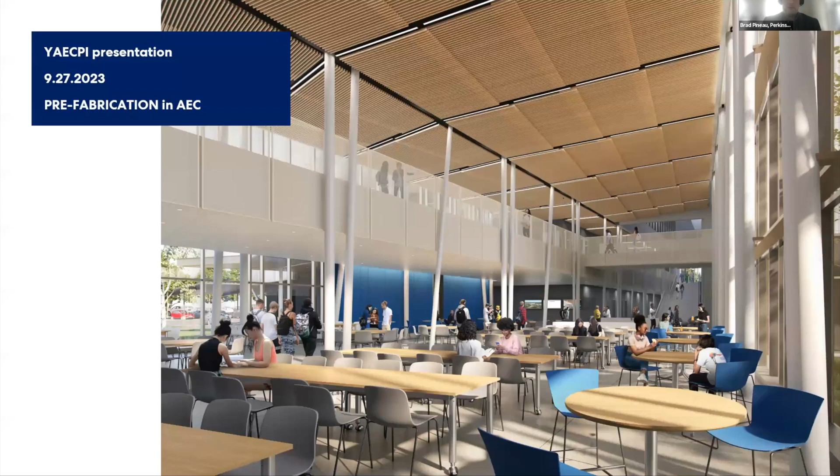Prefabrication and the advantages of full team coordination meetings in prefabrication projects. So my name is Brad Pineau. I'm an architect at Perkins and Will. I'm joined in spirit by Joe Nault, Claudia, and also Sam Shepard from Isgenuity. So between our group, we had two on the construction side and two on the architecture side.

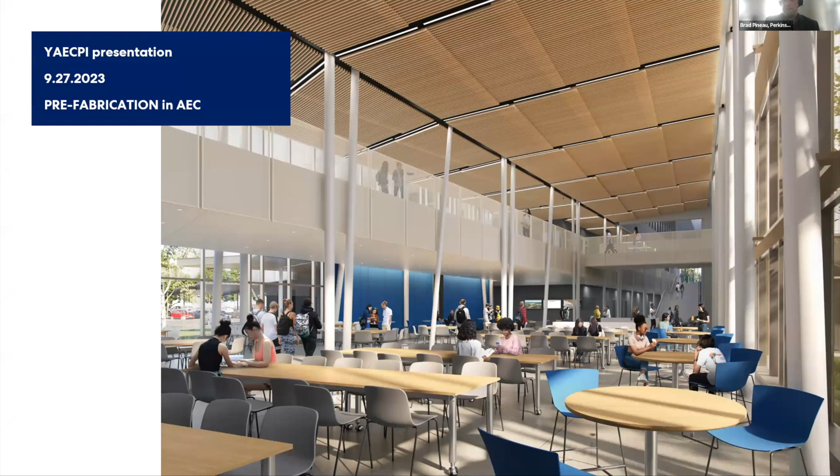What I'm going to be speaking about today, and sort of the purpose of what we wrote about, was looking at the history and processes of prefabrication, and diving a little bit deeper into how that full team coordination has evolved over time. And then we also looked at both the opportunities that are there, but also some of the drawbacks that are there. And then additionally, we wanted to share some case studies, as a few of us in the group have been involved in prefabrication on a first-hand basis.

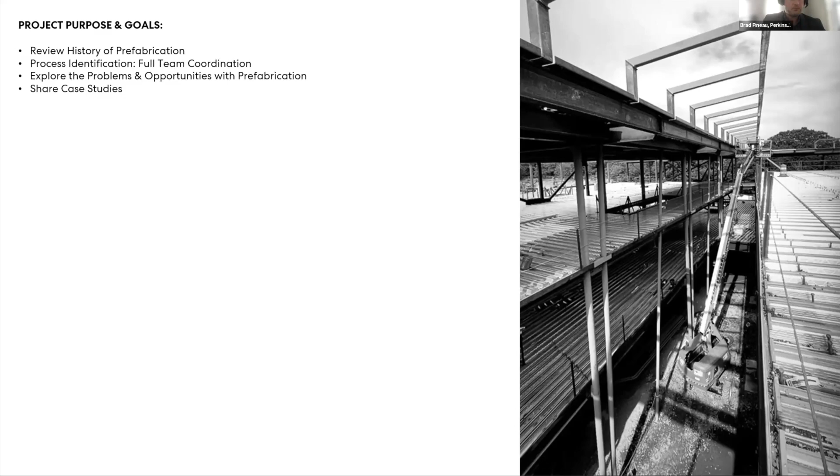So looking quickly at the history and the process identification, as we like to think of it, prefabrication has a really great opportunity to streamline the construction process for many reasons. However, it's not perfect, and modular does not necessarily mean prefab. And I think that was a huge takeaway for us, that it's not always about perfect rectangles fitting into Tetris style designs. Rather, these can be very complex, and oftentimes going for a complex design, it might be really advantageous for many reasons to have a prefabricated execution strategy.

And then also looking into the past, it hasn't always guaranteed efficiency. I think it's an automatic thing for everybody to say, oh, prefab, that's going to be quicker, easier, et cetera. And it might be, but it hasn't always been.

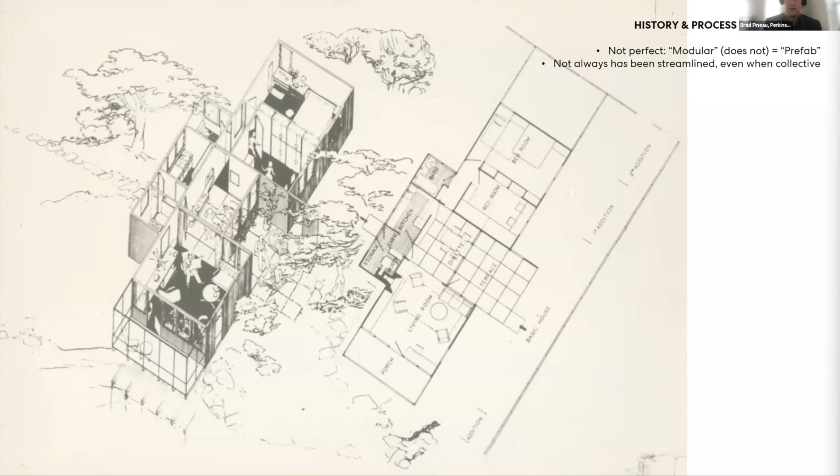So moving into some of these methods and maybe where we are today, what we've been noticing in the industry is that, through the use of advanced technology, there's quite a bit of availability for our different sectors to overlap. So really starting at the beginning, looking at the schedule and getting the owner and the client on that mentality with you about how we can make this project more streamlined, will ease that transition for the whole team to exercise this new way of thinking about prefabrication.

Then we're moving into what some of us might know of traditionally as the design phase, which can be explored more with more stakeholders. So in other words, it's not just the architects coming with the design, rather it could be an opportunity for the contractors to give their input about how certain elements of the design might be delivered, how it might be fabricated, etc., so that it allows the design team to react and design that type of thing into the project.

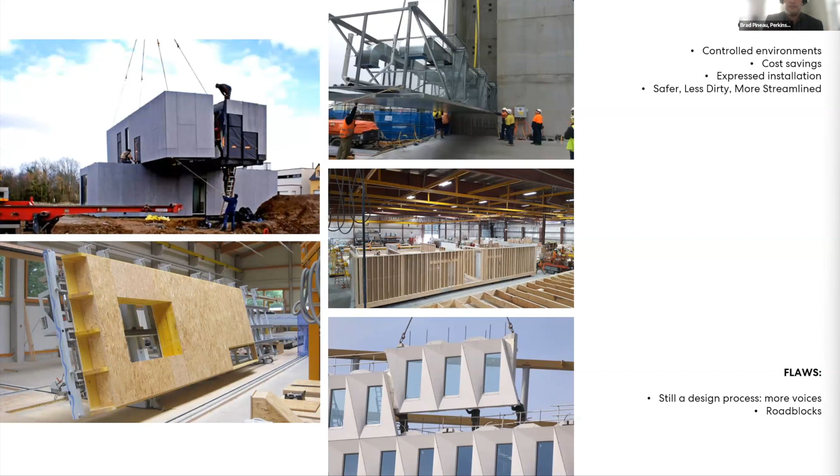So lastly, what we really wanted to emphasize was a couple of case studies. Joe is not here to speak about it, but I will try to help. And then I've also provided one of the high schools that we're doing as well. So this is a look at 50 Rogers Street. And this is a high-rise 136 unit apartment mixed-use building.

So anybody that might have worked on a project like this, there's lots of repetition. There's usually a very common core space where you need to run lots of plumbing and mechanical, and on a large scale, that becomes a really sensitive topic, because any delays are going to affect cost, and it's usually very repetitive work. So the easiest way to get that executed is to have something in place and make everything the same. So what Joe was working on in his job was the shell of this shower enclosure, such that they were able to literally drop these units in place, let the plumbing be hooked up, and then bring everything else around it.

So what it allowed them to do was to streamline their coordination process, and also streamline that install, so that this particular team that is touching many different contractors, plumbers, tilers, flooring, wall framing, all this, it's just making this whole thing much easier to build. And as you can see from these photos, it's a really nice end product.

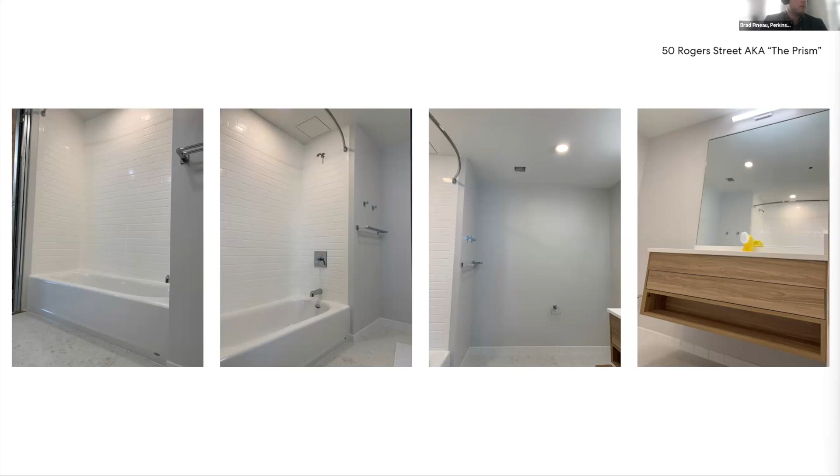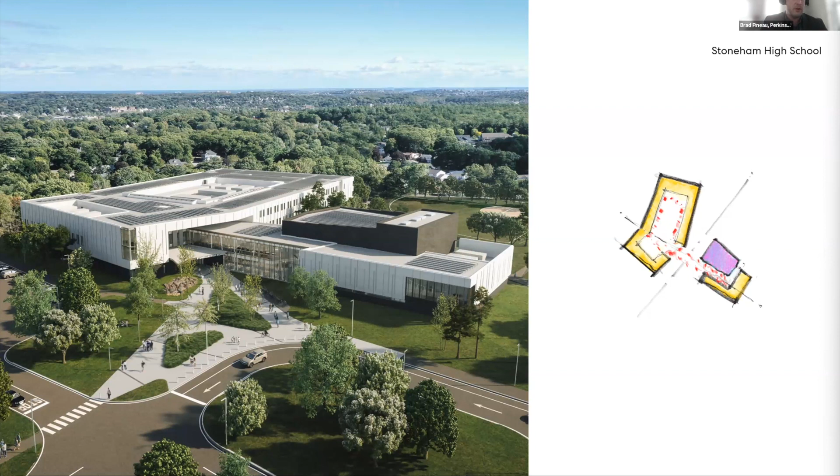This is our tree path, and we have this concept about path and promontory. There's a very kind of throwback to nature that we're striving for in this job. So what that's led us to over the course of the design process is we're looking at these columns, not just vertically, but we've put an angle on them. So there's a through-the-forest type of effect going on, as you can see in this diagram, as you come into the building and experience these main spaces.

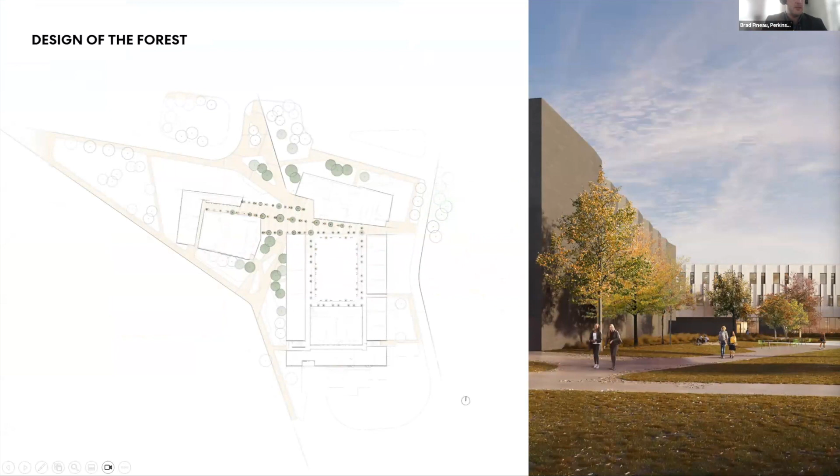As we started to get into the details, we recognized that we needed to really account for the function of how the flooring was going to come together, and also how we were going to tilt these columns into place. We didn't want to have a bunch of columns tilting in different directions. We wanted to really be controlling of how that pattern was laying out. So we started to work through these details to both handle the function as well as control the angle of the column.

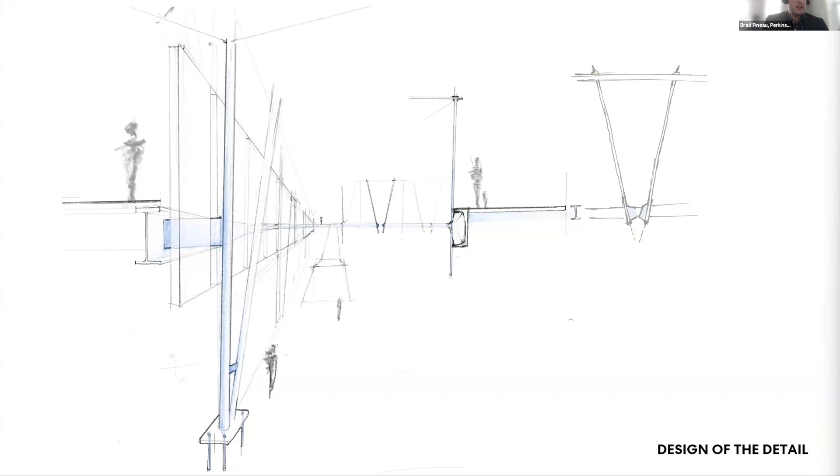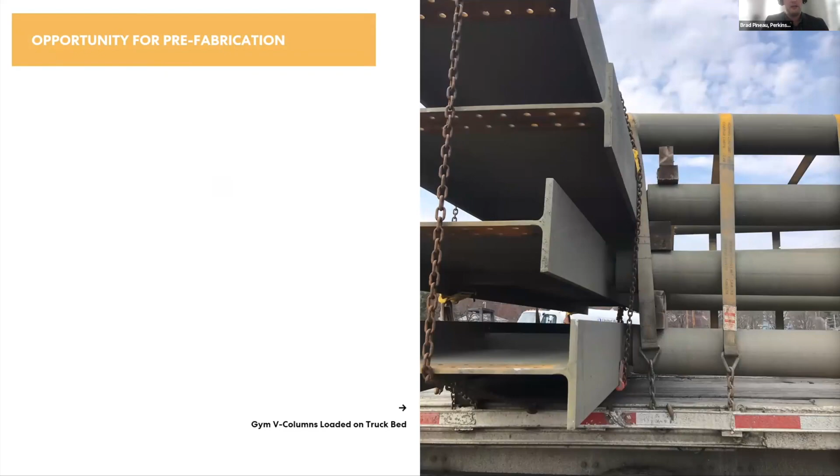So where that ended up leading us was to a place where we said, well, we could use that detail to help prefabricate these members, and maybe that could both allow us to get what we want on the design end, but also help that contractor come to site with deliveries and ultimately execute this thing in the field rather than stick built.

So we were working with Consigli on this project, and it was very simple. We had some draft renderings. We had some Bluebeam elevations of some ideas, and we literally worked through this in sequencing, talking about logistics. We're using some of these details to help us control the angle of these columns. And we were able to determine how wide they might be so that they could travel to the site appropriately, and how long and all that kind of thing.

We do a lot of filed sub-bid work in Massachusetts, so we don't really have full control over how they're going to do this. So it was really a conversation with the CM about trying to strategize and lay the groundwork, I suppose you might say, rather than specifically telling them, hey, we're going to prefabricate this thing.

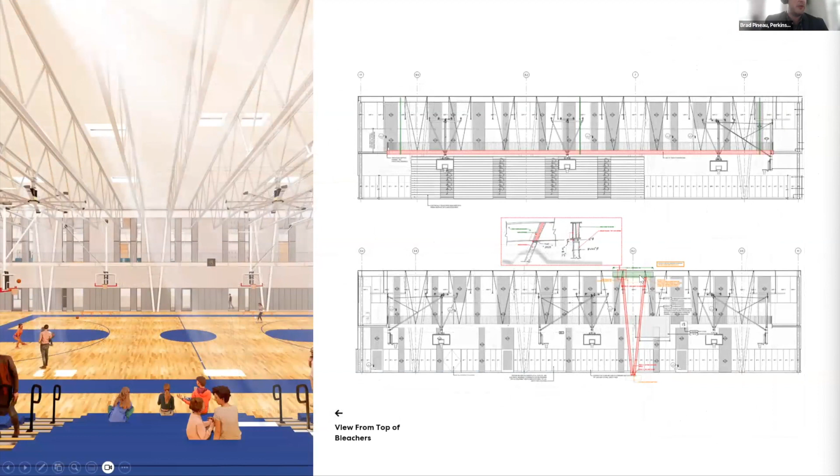When we got to shop drawings, we were really surprised. Actually, if you go back to here, we had planned for this to be in two pieces, the green and the red. And when we got to shops, they actually ended up putting this whole thing together, which was really exciting. Both that our plan worked, but also that they were even taking it a step further. I've got some photos here of them bringing these pieces to site. And then this is for our main gym space, which you saw in the previous rendering, and what they're able to do. Let me just do this real quick.

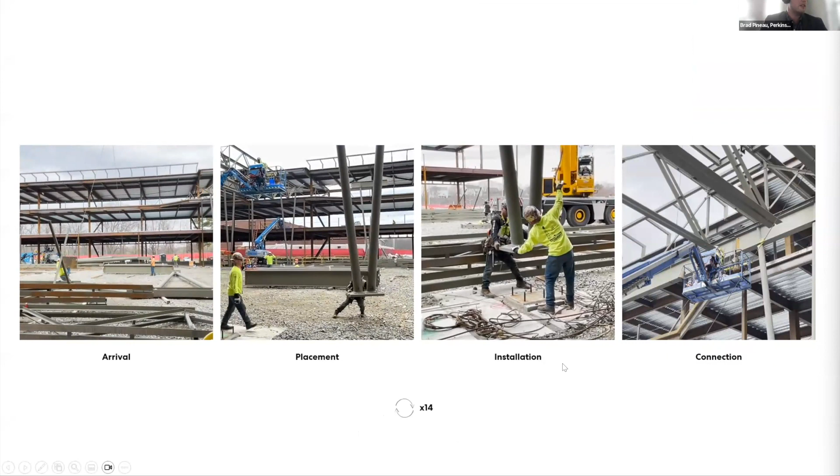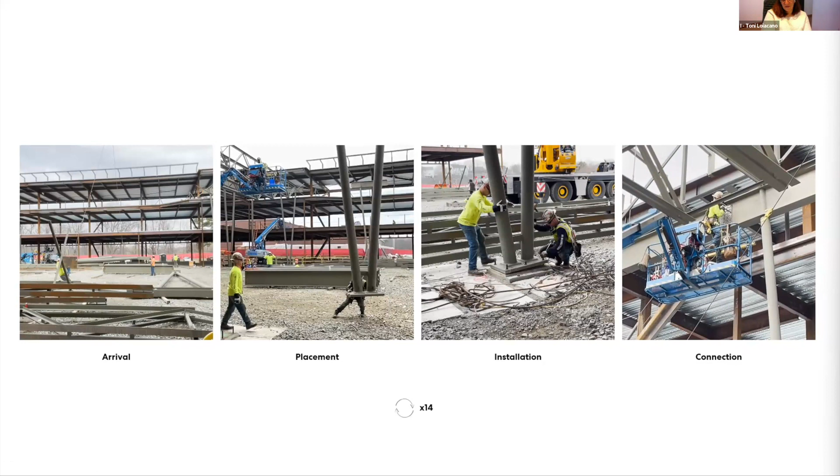So you can see them swinging this thing off the truck into place pretty quick, and only requiring a couple of guys. Then the crane is lifting this thing up, swinging into place, and just taking two guys at the base and maybe another guy up top. They put the bolts on, and then they're able to take these splice plates and nail it all together. So all in all, we built the whole gym in probably 5 days. So it was a great experience for Consigli, and I think for us as well, to have this unfold.

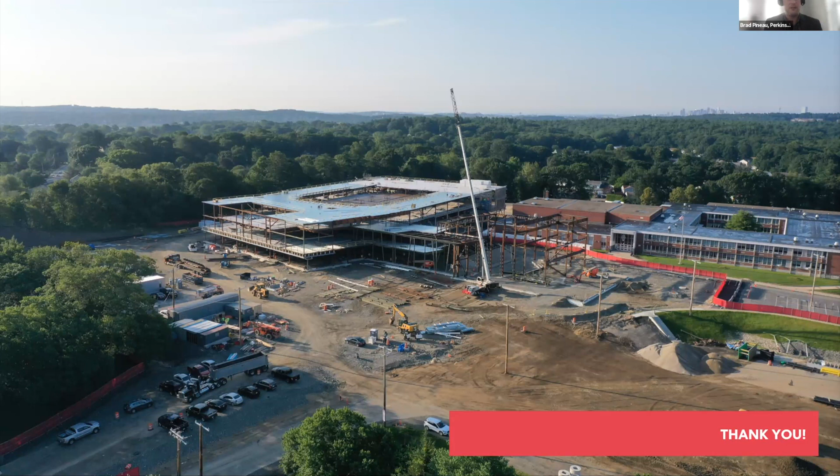So in conclusion, after going back through this, we think that prefabrication is a great and very useful tool that can be used on projects. Although we do recognize that there are potential, I don't want to call them flaws, but I might just say there's a potential for it needing to be the right type of job and the right type of opportunity for prefabrication. However, if that opportunity is there, I think as we move forward as an industry, we should really be looking to move forward with these types of planning, because it really does make things a lot more streamlined in the field. So thank you very much.